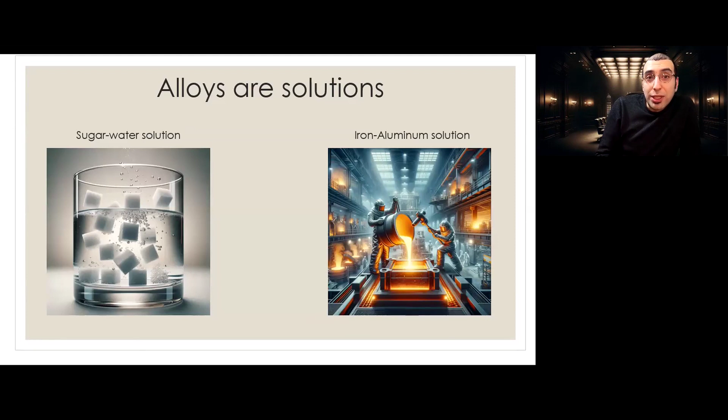So alloys are metal solutions. A definition of an alloy is a solution that has at least one part in the form of a metal or a metal element. So that's a definition of an alloy. It's a mixture, like a solution, with at least one part metal.

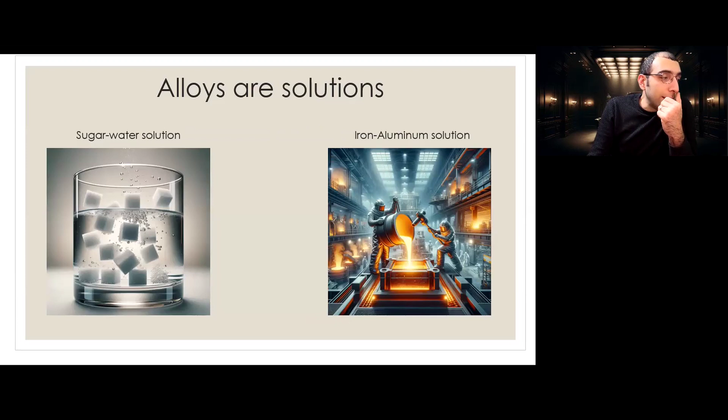Alloys, the word and everything, seem to be something really new and modern, but it is not so. If we look at history a little bit, many years ago we started with the Stone Age, right? The Stone Age started from somewhere between 2.6 million years ago to about 10,000 BCE. During that time, we didn't use any kind of metal.

But starting from the Bronze Age, like 3000 BCE, something about 6,000 years ago, the Bronze Age started. And bronze is an alloy. So from then, 6,000 years ago, people could extract metals and make alloys of them. And then it was the Bronze Age.

And what came after that was the Iron Age, about 3,000 years ago. Iron was also used in different alloyed forms, meaning other elements were also dissolved in iron during the Iron Age. Different civilizations entered and exited each age, like the Bronze Age and Iron Age, at different years or eras, but altogether that was the transition from the Stone Age to the Bronze Age and then to the Iron Age.

What it tells us is that people so long ago were also using alloys, and somehow, without knowing chemistry and physics the way we know it, they could extract these materials and make these alloys. It's interesting to realize that they had a different way of understanding materials and nature around them, somehow different from our way of understanding, because we are using different methods and understanding to come to the same conclusion or application, like making an alloy.

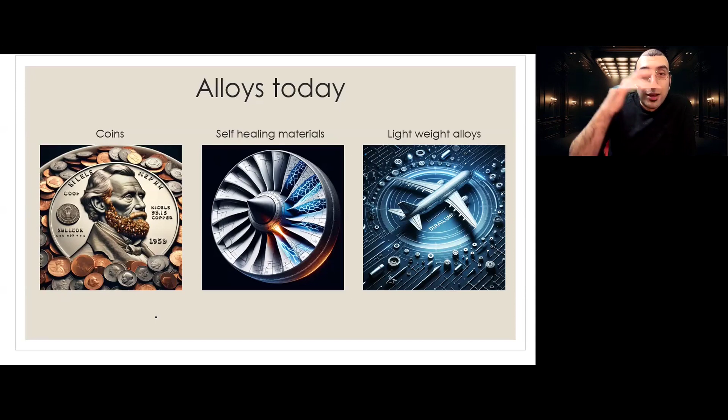I think they were mostly working within the framework of alchemy, with the highest idea of turning copper to gold. That was like the holy grail of alchemy that they never achieved. But to get there, they discovered a lot of physical and chemical phenomena in that path, which is really where our modern chemistry and physics are coming from. That's how I think about it.

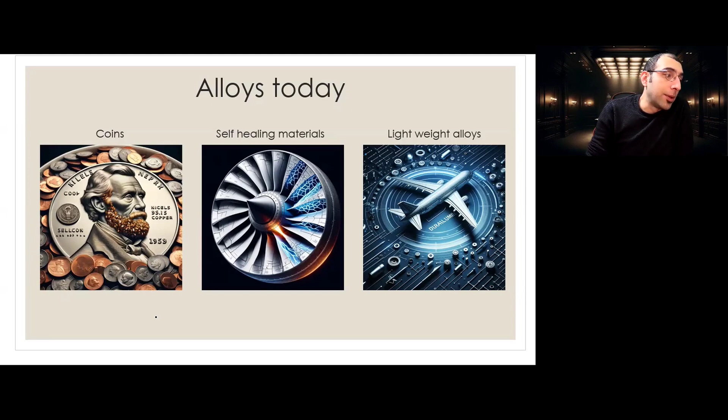So this is about alloys in the past and alloys now. They are a really, really interesting concept. As I said, alloys are metal-based solutions. They are a mix of at least one part metal. That's what we call alloys.

If you look at the picture on the right, the same way you make sugar and water as a solution, that's how you make a melt - you add your materials together and then you either cool it down or heat it up for the mix to get one phase, to get a solution. Also, most of the time, in these big melting pots, you also stir in some way, either mechanical or using some other method, to get a good mix to make an alloy.

So you need to mix metals together to get an alloy. And for metals, it's not like sugar - you don't mix it at 20 degrees or 80 degrees. You mix them at 1,000 degrees, 1,500 degrees, depending on the type of metal that we have.

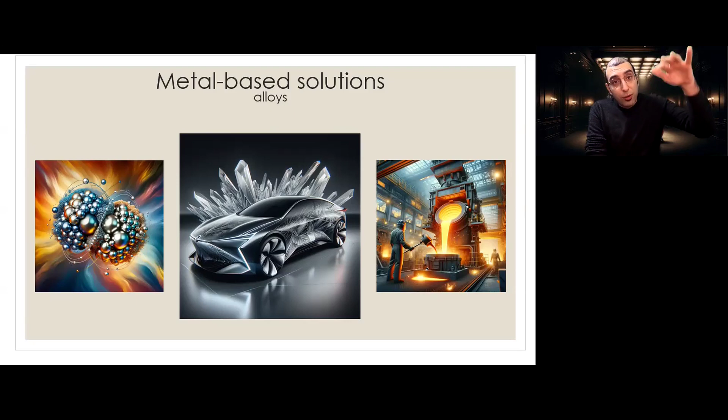For example, aluminium and magnesium, their melting temperature is somewhere around 650, 660 Celsius. So from there you go up to 1,000 degrees, 1,500 degrees to have a melt if you want to make an alloy in liquid phase. If you want to create your alloy with all constituents being liquid, like liquid state processing, you have to melt everything beyond their melting temperature, or at least your solvent, to be able to have that kind of solution.

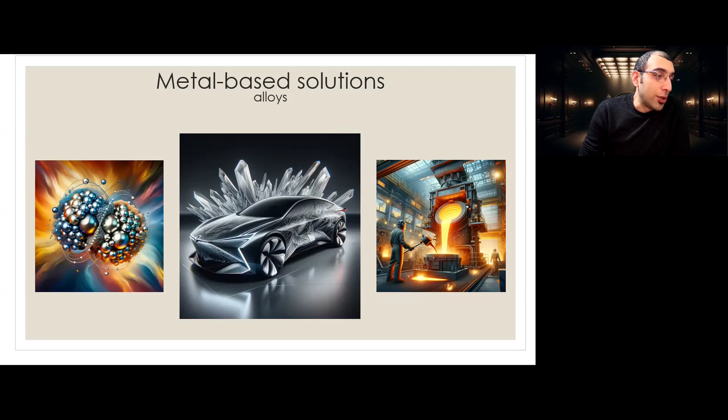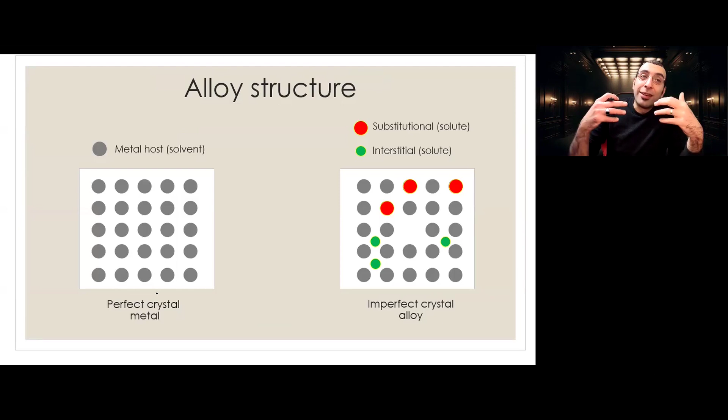So in many ways, alloys are just a solution. To be able to mix metals or materials together and make an alloy, first of all we need a host, which is our solvent. That is your base metal, like aluminum or magnesium, that you want to make an alloy of - so that's your host metal, your solvent, the big chunk that's going to take in other elements and materials to make an alloy.

So that host needs to provide somehow available room for other alloying elements, solutes, the smaller chunks, to come in and make a solution all together, one-phase, just one. There are ways this host can provide available room for alloying elements to come and take a place. One kind of available room that is generally available, thermodynamically stable, and always there, are vacancies. That's a natural available space in your host material.

So if it's the image on the left, if it's a perfect crystal structure of a host metal, and these gray circles are atoms.

So atoms are nicely arranged, looks like a crystalline material because it's ordered. The atoms are arranged and it's a perfect crystal. Well, perfect crystals don't exist.

We can create them in some controlled conditions, but in nature, perfect crystals don't exist. Crystals that exist in nature, naturally and thermodynamically stable, are imperfect. So they are always imperfect. How are they imperfect? They have vacancies.

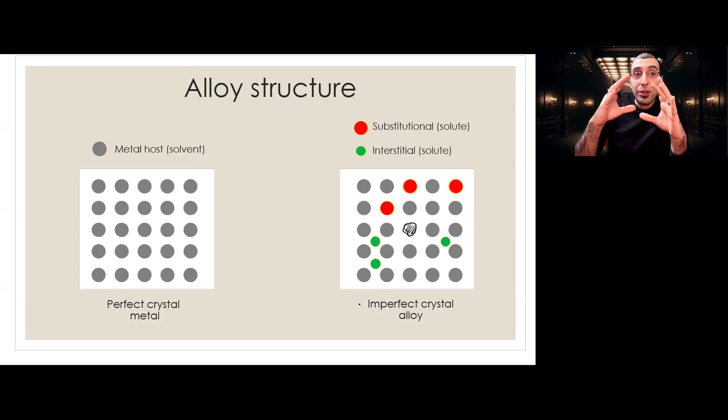Look at the image on the right. In here, there should have been another circle like that, but it's missing. That's what we call a vacancy. So vacancies are these free spaces, these open spaces within the crystal structure of a metal that are missing. There is no atom in here. When you have a missing atom in these places, then you have a vacancy here. That's what we call vacancy.

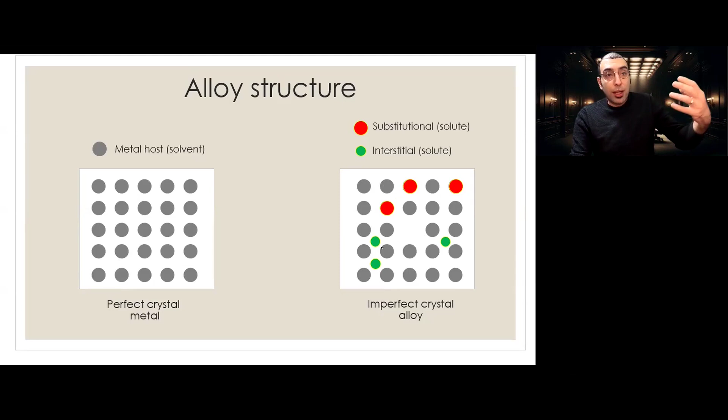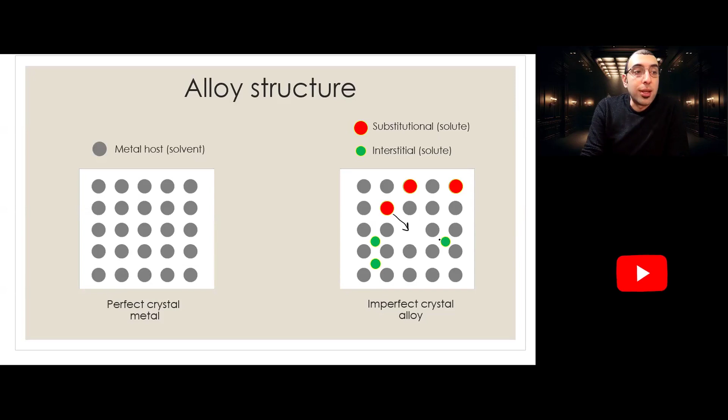This empty space we call vacancy, and this empty space can provide room for the solute atoms that are going to come into our solvent. For example, this red one, which is an atom of the solute, an alloying element, could come here and take its space. This one, which is also another alloying element, a second version, can also travel to here. So this is just a general available space for anything that can fit in this area, more or less fitting, that can come in.

So vacancies are an important part. Second thing, second kind of providing available space is by substitution. So this one is by substitution.

Substitution means that for substitution to happen, you need to get rid of a gray one, you shoot it out, you kick it out, and then one atom of your alloying element, your solute, comes back and takes its place. So these red ones are substitutional replacements, substitutional alloying. So what happened in these red ones? Same thing: one gray was kicked out and one orange or red came in. That is your alloying element. That's the substitutional way. One atom needs to go out of the host for the alloying element's atom to come in.

A third way is interstitial alloying. When there's an interstitial element or alloying element, these are like these ones, these green ones. These don't require the process of kicking out one atom of the host. They can just very well fit in between the atoms of the host because their diameter, their atomic radius, is small enough for them to fit in between the atoms.

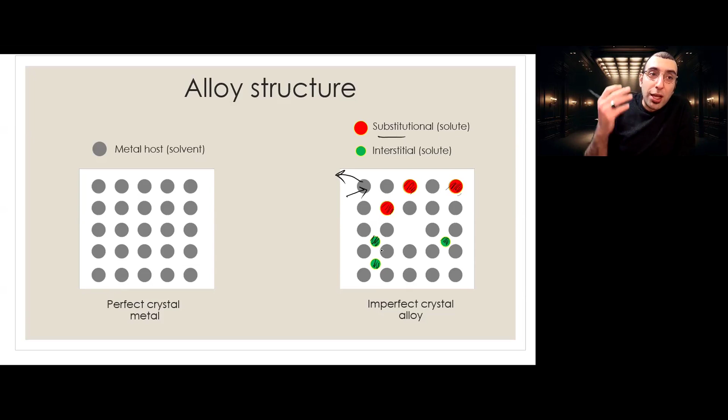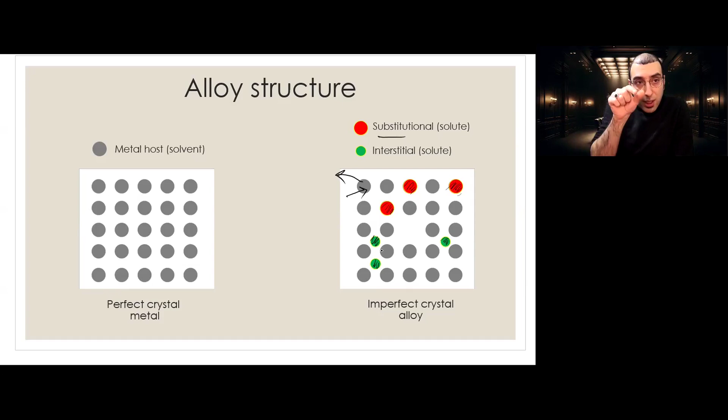There are ratios of the atomic radius of the host to the atomic radius of the alloying element, for them either to be substitutional or interstitial, because there's a size limit for interstitial alloying elements. If they're bigger than a certain size, they cannot fit in interstitial spaces, but there are numbers you can always look up for different crystal structures and different materials. I intentionally don't talk about numbers because they're different for every material. If you have a material of interest, you really dig in. You learn it as a target, but we're talking about fundamentals here, and that's what's important. Then you understand everything, then you know where to dive in.

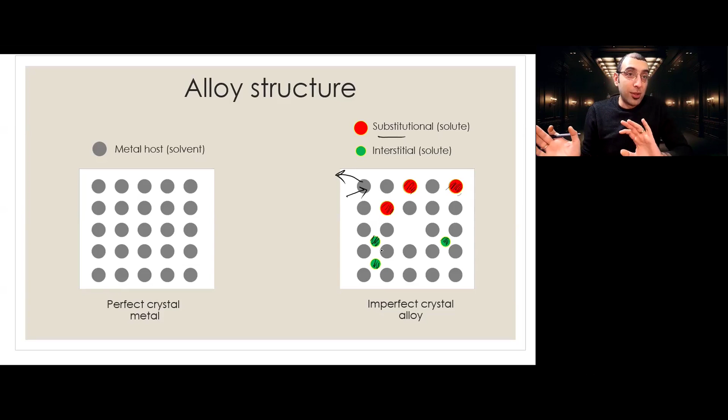That's the whole idea. So we have vacancies available, we have the substitutional way of alloying materials, and we have interstitial spaces available, which are smaller in size than substitutional, where you get rid of a big atom to fill in. So crystals are also not perfect, but that's what an alloy would look like inside when there's a solution. That's a solution, that's a pure metal, but pure metals, as I said, are never like that. Even in non-alloyed form, a pure metal will be missing some atoms in these places, so there will be vacancies.

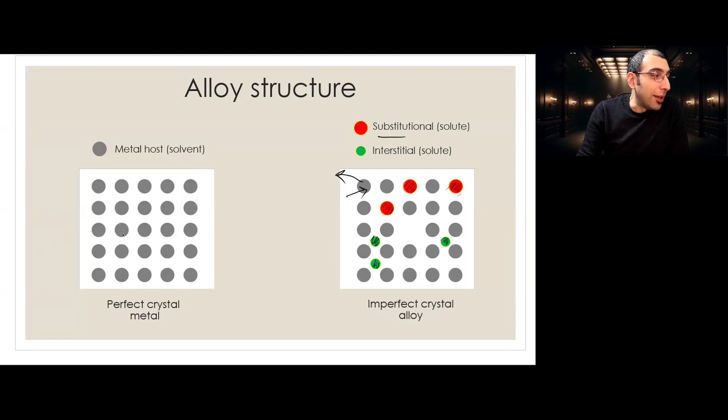As we said before, with the Bronze Age and the Iron Age, there are also these classical alloys that we make as a solution. For example, bronze: now we know it's copper as a metal, as a host, and then 12% of tin is added to it, and they made a solution. So here, our copper is our water, our glass of water, and tin is the sugar cube. Then we dissolve them all together. In that case, it makes sweet water. In this case, it makes bronze.

That's it. Same case for brass. It's copper as the parent host, and then you mix in 34% of zinc, you make a whole solution. Everything is dissolved, so it's just like sweet water, and then you make brass.

But we added 12% of tin to the copper. It made it harder and also corrosion resistant. So it's a different property than the copper itself.

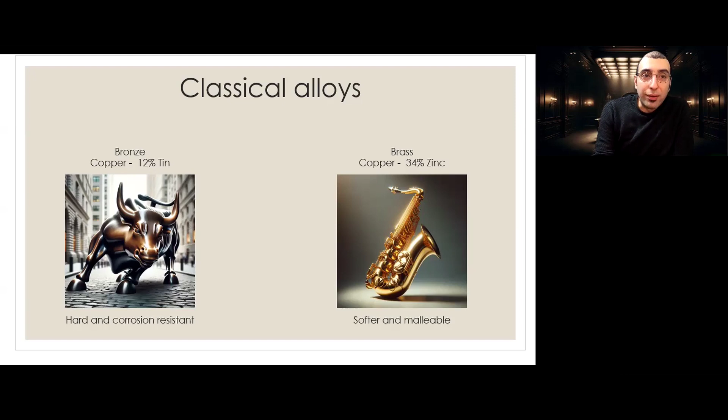Now imagine the spectrum of materials that you could have. It's like between 1 and 2 there's an infinite number. That applies to making alloys as well. So you can really be creative about making alloys.

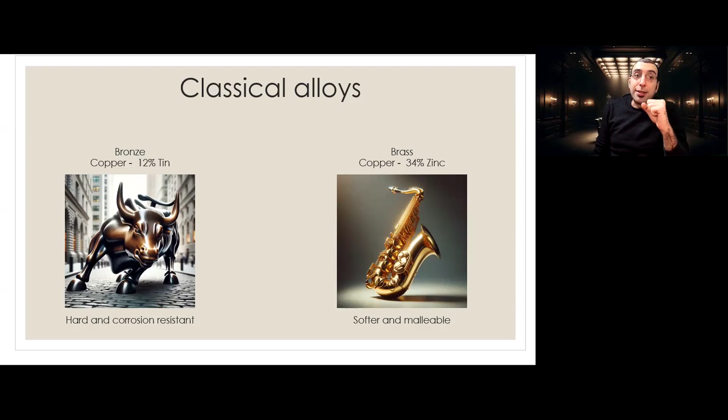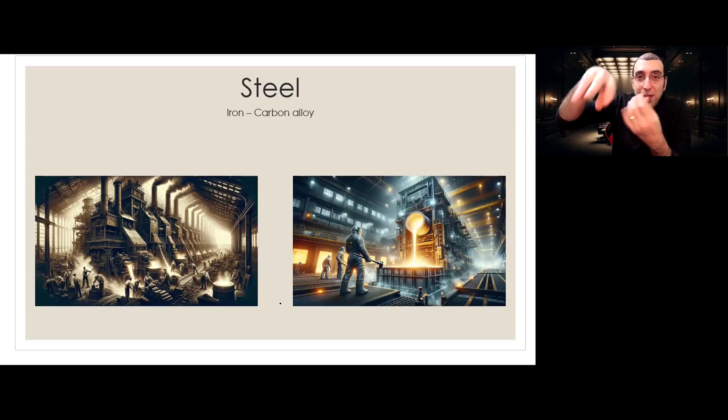One alloy that has played a main role in the industrial revolution is steel. Steel is an iron-carbon alloy, meaning you have iron as your solvent host, and then you mix carbon into it until they become one, and they make steel.

This steel, relatively more modern than all the classical ones we discussed, especially in its most modern form, we've been making for decades. We have very old steel making factories that kind of look like the modern ones. As you can see in the picture, they are basically doing the same process.

Of course, with the knowledge we have now, we're making much more complex chemistry for our steels, and the properties are now better, but we still use steel for all those applications.

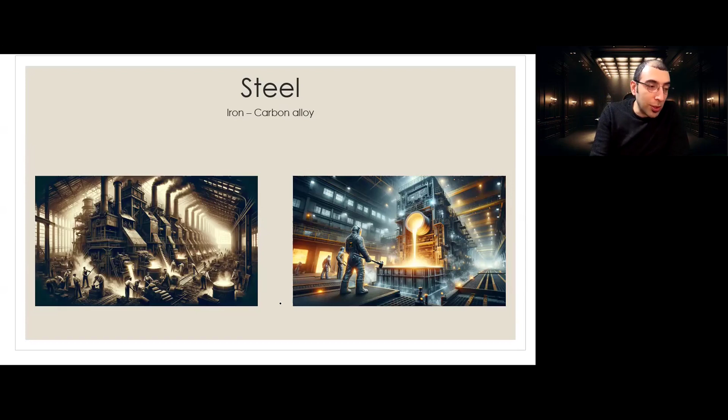So steel has a big role in our industry, and as material engineers, we need to know about steel because that's one of the fundamental materials we use in our industry. So we really need to know about it.

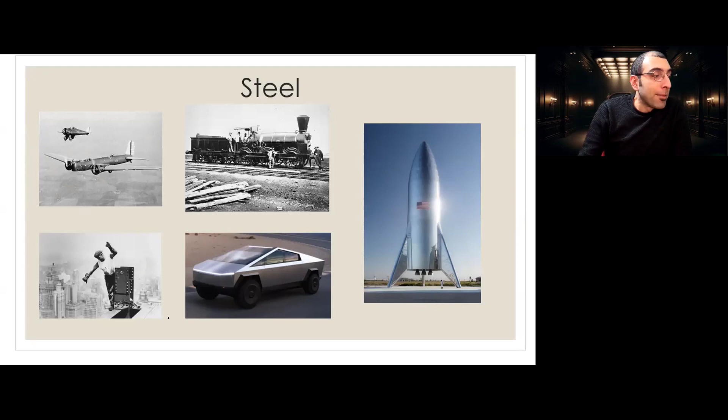To understand steel as an alloy, we need to bring all its phases into a phase diagram, making an abstract of it to understand what phases form, how much carbon you dissolve in your iron, and by the percentage of carbon you're adding, what kind of phases you get at which temperature.

Just like the sugar and water example, at which temperature for which composition of sugar you get what - this is the same thing. So instead of sugar, you have carbon, and instead of water, you have iron.

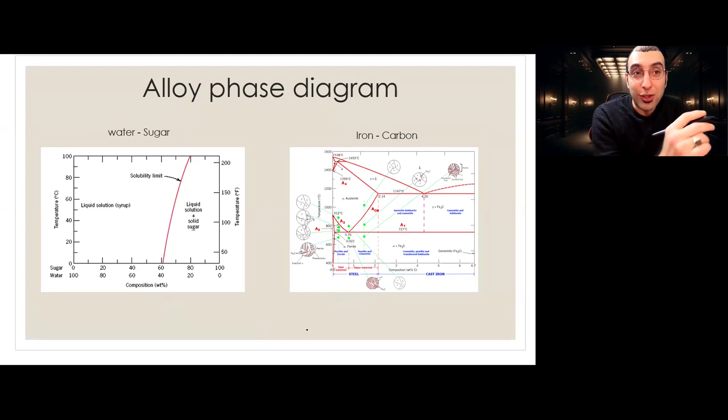For the next video, we want to really bring that into our understanding. So when we look at the phase diagram of iron and carbon, which is steel, compared to sugar and water from the previous course, we need to look at this as a solution, seeing at which composition of carbon and at which temperature what phases we get, all those supersaturation concepts - can we make a supersaturated steel.

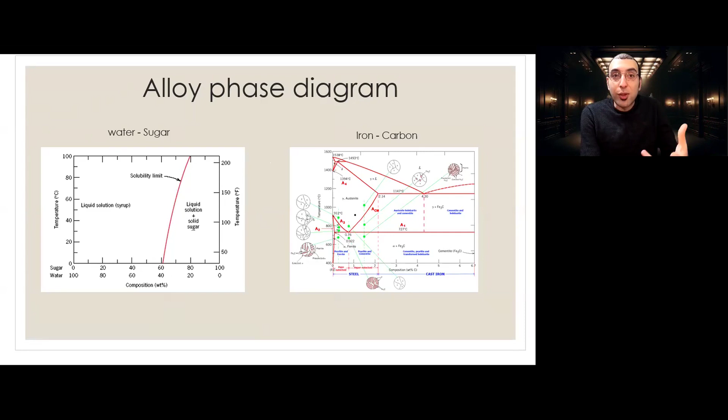And what crystallizes out of the supersaturated steel at what temperature. So we're going to really bring all that into our understanding and have an idea how this specific alloy is made, and also try to apply it to other alloys, and discuss some smart materials and shape memory alloys in the following lectures.